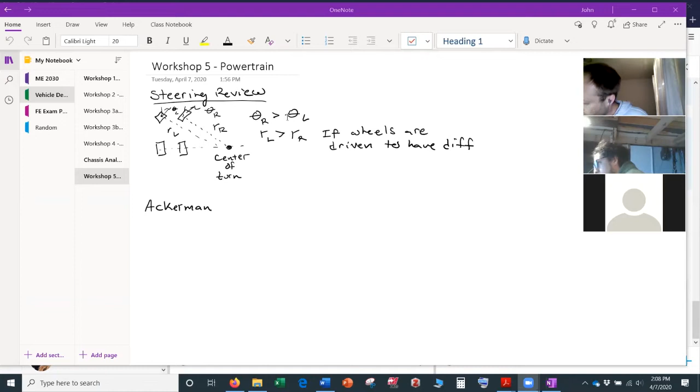But so to set up our car so that we get this to happen, basically, we set it up in what's called Ackermann geometry. Oh, before I get into Ackermann geometry, we had to talk a little bit about some other angles on the tire, right? So if we had our tire, maybe this was the inside and this was the outside of the car, and our upper ball joint connected here, and our lower ball joint connected here.

I'm gonna unmagnify that a little bit. Maybe that was a little bit too much. It's still a lot. I can't draw a tire with just a little bit of camber. There you go. There's just a little bit of camber.

So here's your upper ball joint, here's your lower ball joint. And right here, this was our steering axis. So this is what the tire rotated about, right? And so if we drew a vertical line right here, kind of the center of the tire on the ground vertically up, this angle right here was our kingpin inclination. So we call that our KPI, right? And we said our KPI was usually around 5 degrees pointed towards our car to help with stability.

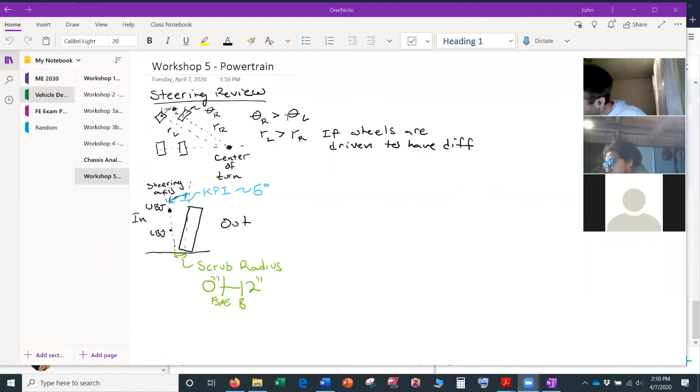And then we had this distance down here. So where this hits the ground versus here, we call that the scrub radius, right? And this scrub radius was usually larger than 0 and up to about 2 inches. FSAE was probably in this range, and Baja was a little bit more over here. So formula is a little closer to 0, ease of steering basically. Baja we go a little closer to 2 to help with the weight shift and the stability of going over the big rocks, kind of straight line. Help us keep the car driving straight.

And then we also should keep in mind, I heard max for us could be like 2 inches. That's like max. Yeah, I think that would be the max you would think about going. But I think it's going to make your tire harder to turn, and I don't know how much you need the stability. So I would think you would probably go somewhere between 0 and 1. I don't think you'd push out to 2. Oh, okay. But I wonder, at least for Baja, if our max is 2 and you're at 2, what if you did like 4? What would that do?

But then I think your tires are skinnier, right? Yeah, they're a little bit skinnier. They're 7 inches wide, roughly. Our formula tires are 8 inches. Oh, okay. So that's probably a little different. Yeah, I mean, it just would get really hard to turn, right? Because as this gets angled in, you imagine as the tire turns back, it rotates in and down basically into the ground.

Right. So it gets really hard to turn your wheels, essentially. So you probably don't want too much. And then it's also feel, right? I think it's feel, and then you could also heat up your tires that way.

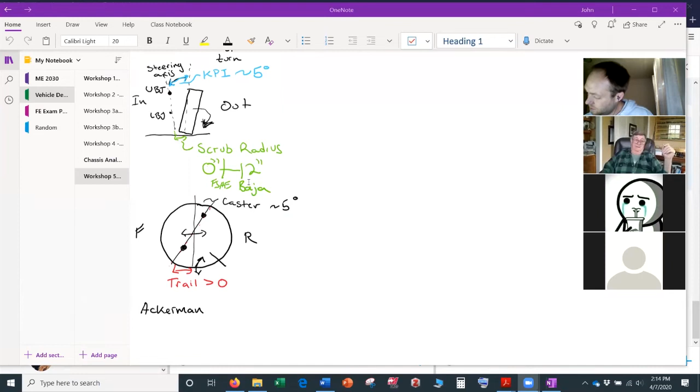So we can step into a little bit of Ackerman geometry. So if we have these 4 wheels, again, we're looking at a top view. This is the front of the car. Here's the rear of the car.

Remember your first steering setup? I still remember those days. My first setup? Yeah, remember we messed up what Ackerman was in the first year, and we had to flip everything around last minute, and we had no scrub radius. Oh yeah. Wait. That was when Luis was still doing front, right? Yeah, I think Luis was doing front. You're right. That wasn't you. No, I was doing the steering though.

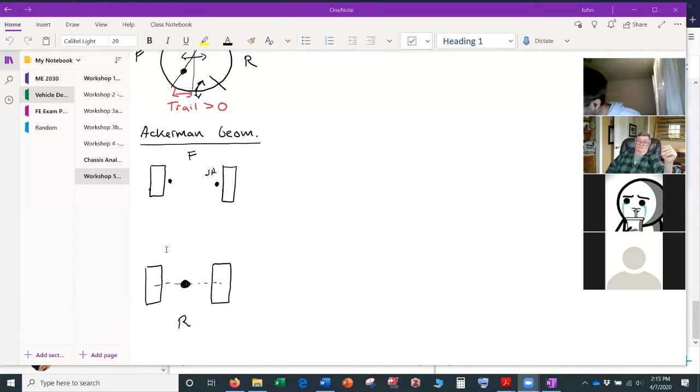Okay. So here's the steering axis in the top view, and usually you draw a center line between your tires, and you put a point in the center. Then you draw a line from your steering axis back down here, right? So these are your 2 steering axes. And to get this Ackerman geometry, you want your connection to your rack.

So let's put a rack here. Here's our rack. And at the end of the rack connect 2 tie rods. I'll make my tie rods these colors. And at the end of the tie rods, if you have good Ackerman geometry, you lie on this line. So this is Ackerman geometry right here.

Remember that this was not completely accurate because your rack isn't necessarily in a straight line here, and it's not a solid bar. Ackerman did this for a horse-drawn carriage, so it had a single bar that went across. So now that you have your rack, this is an initial setup, and then you want to test it with that model that we used.

But this will give you Ackerman, which will set it up so your right tire turns a little more than your left tire on a right-hand turn. So, deficient Ackerman. If you set up in this area, let's say you have your tie rod connect here. So these are your tie rods, right? Let's say you come back here, something like this. And here's your rack again.

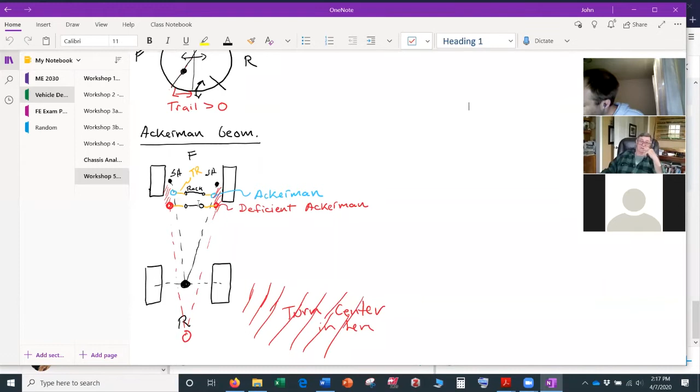Okay, so here you go, it's in here. Here's your turning center. Perfect Ackerman, your turning center is like right here. And then if you go excess Ackerman, so let's say you connect your steering arm somewhere in here, basically. Then your turning center is going to come up in front. So here's where your turn center is.

Right, and that would be the case where you make a connection here, or like a connection here to the end of your tie rod, which basically means your steering arm would look like this, right? So you'd have usually some steering arm coming off your upright. And so this line would look something like this. We'll just pretend, and they would meet somewhere here, basically, right?

So if you do this line from your steering axis through your mounting point to your tie rod, so we can do a little rack. Here's your little rack. So if you have this mounting point and you draw a straight line and it goes to the front of the rear axle, then your turn center is gonna be in front, and that's because of this point right here, right? So this was deficient Ackerman or excess Ackerman.

Right, versus vice versa. If you have this connecting point go outside, then you draw this straight line, it's going to come behind, and then your turn center is going to come out in the back, right? But make sure, this analysis is just to get you in the ballpark, right? So you should really simulate what we did last time and see where the turn centers actually are with an actual rack and pinion system.

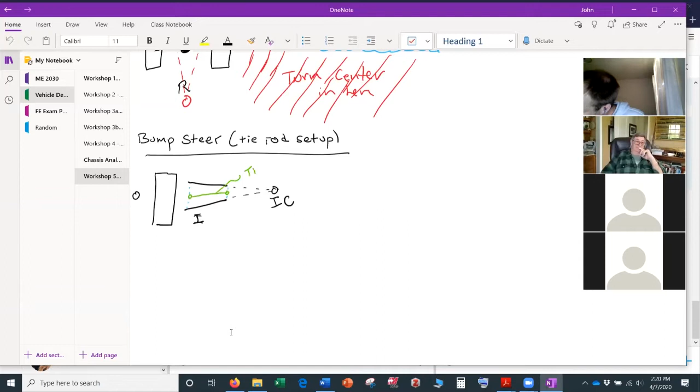So we extend those out. And this point was our instant center, right? That's what we say our tire moves around. So if we want to get it so that our tire doesn't toe in or out as it goes up and down, keeps the tire straight, then we want our tie rod to also point to the instant center, and it should have this length.

But the thing you can do is you can move it inboard and outboard. Because you imagine moving your tie rod inboard and outboard up here, right? You're gonna need to do that so you can get the right connecting point. So it's kind of an over-constrained problem. So in terms of this, we say that the tie rod must point at the instant center, must be length as shown above, right? But you can move it inboard or outboard.

With a smaller penalty.

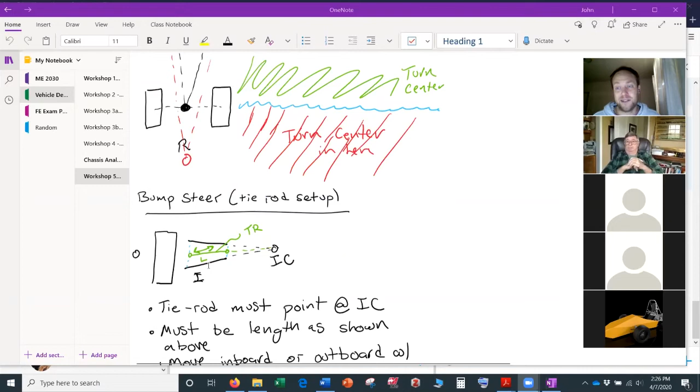Last time we were messing around with the geometry, we were messing around with the rack length. You can't really mess around with the rack length that much, to be honest, because your bump steer is going to control a lot of your rack length. Because this position where it mounts is so fixed, you make up the difference by modifying your rack length. You don't modify where you connect out here, because that determines too much of your Ackerman geometry.

And then the frame would affect it too, technically. Yeah, it can't run into a frame tube member, right? So where you put this thing forward and back, you probably also don't want it sticking way out of your frame. Our frame was at 19, and our rod is like 18 or 17, so it's shorter. Well, you don't want smaller, because then it's probably going to hit one of the tubes to go out to your tire unless it's very parallel to the ground. Depends on the angle, right? For example, this tie rod might hit your frame if your rack's too small. Yeah, we definitely got a big rack.

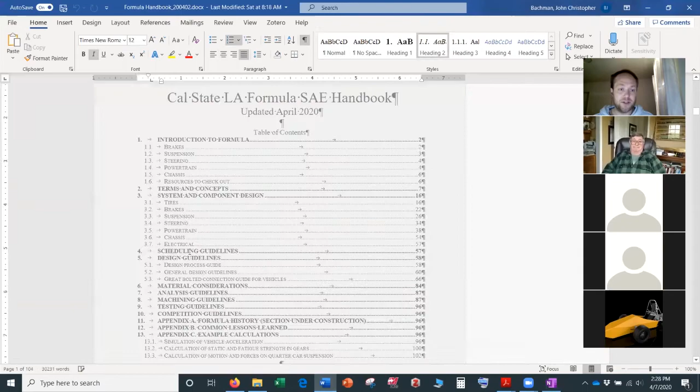So if we plotted the slip angle versus the lateral force, it was the slope of these lines. So the slope of these lines is the cornering stiffness, essentially. So the more slip you get, the higher the force is going to get. So for an oversteer vehicle, whenever you have alpha in the rear greater than alpha in the front, that basically means that the slip angle in the rear, like I drew now, is quite a bit bigger than the slip angle in the front, which is common for our cars.

You're going to get oversteer, and that's typically due to, one, the CG is near the rear. This basically means force in the rear is larger than force in the front in that case, right? So this is force in the rear and force in the front. And so to have a larger force in the rear, because the CG is closer to the rear, you need a larger slip angle, because the cornering stiffnesses are pretty similar. The other thing that can do that is if you have more weight transfer in the rear.

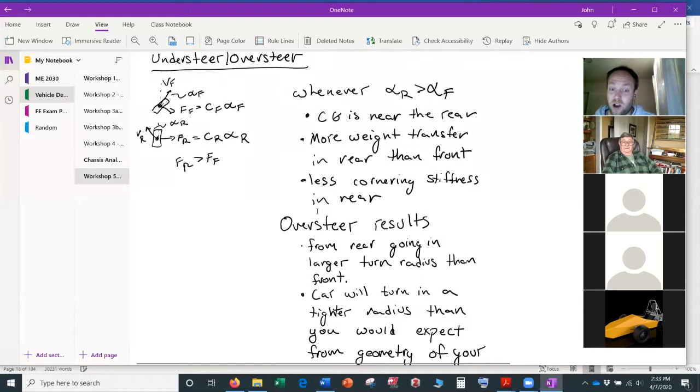So basically, if you have some Ackermann setup, or let's just say from what you expect from the geometry of your car and tires, based on what you predict from your tires, you might predict you're going to turn around this point right here. But because dynamically you have a larger slip angle in the rear than the front, you're actually going to be turning around a tighter turning radius. And your front is going to dive deeper into the turn. So your front's diving deeper into the turn.

And this gets worse the harder you turn. So you imagine up here, if these forces start to get larger and larger, the difference between these two is also going to get larger and larger. So you're going to oversteer more and more.

So we kind of talked about how the drivers complain a lot about oversteer or understeer. With oversteer, you're going into a turn, and as you're getting to the pinnacle of the turn, your car basically keeps going in more than you want. And so you end up thinking you're on your line, and you keep having to back away from it because your tire's pulling you in there.

So that was kind of what we covered in terms of steering, right? And so to correct for some of this, you typically have some anti-roll bars, or you mess with your shock setups, like the stiffness of your front versus rear shocks, or your tire pressures front and rear. So typically on the track, you actually will want to adjust to get closer to neutral steer. So that's one reason why you might just have one anti-roll bar, so that you can adjust the relative stiffness of the car in the front versus the rear, so that you can tune in a more neutral steer car.

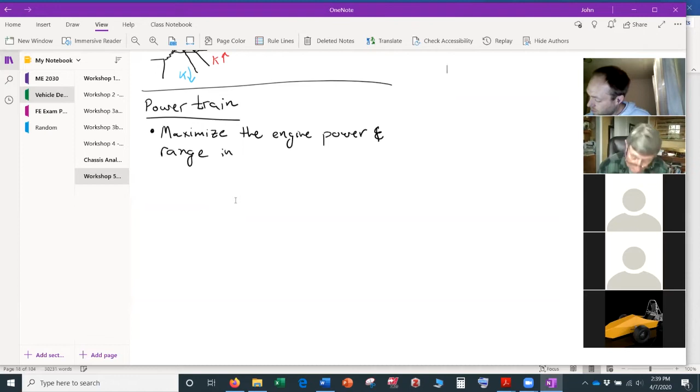So that's one of your first goals. Baja don't care so much about that, but then for drivetrain, so that's kind of the engine power unit type folks. Drivetrain wants to maximize the time when operating near peak power, right? So your powertrain, your drivetrain should be designed to keep your engine operating near its peak power point, right?

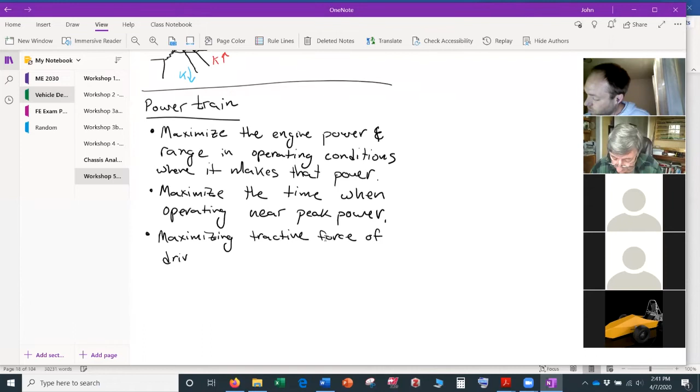And then also, if they get any say in the tires or some geometry, they should be maximizing the tractive force of driving wheels, right? So that's why we kind of started off with just basic dynamics at the wheels, basically, because any decision you make on the car, its influence has got to be done through the wheels, right? So it's kind of the gatekeeper of any decision you make.

And you have these other goals, right? Which of course are like reliability. This thing can't break, right? You probably want it to be drivable by your drivers. I mean, so you design some great car, but it's too complicated for any of your drivers to drive, it doesn't do you any good, right? And it better integrate with the vehicle and suspension.

Vehicle suspension and dynamics, right? So an example of that would be the Baja team, they drive with a U-joint. So that's actually one of the kinematic links of the rear suspension, right? So anything they do is drastically affecting the rear suspension.

Or like in the Formula car, they want to run a double wishbone suspension, right? Which basically means you cannot run a U-joint for that type of suspension. So the drivetrain is kind of forced to run a CV, something that can allow for a change in length of their drive shaft, basically, like their plunge. So you got to keep those in mind.

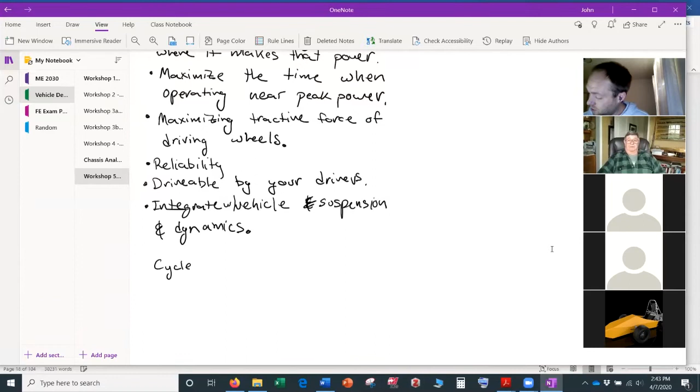And we're gonna talk a little bit about the engine. So we're gonna do kind of the valve plot, the cycles of the engine. So this will be kind of a review if you were there for talking about the cycles of the engine. Right, so this is gonna be a 4-stroke SI, so that's spark ignition. We're gonna be talking about 4-stroke spark ignition since that's what we all use.

Oh man, how can we continue without Juan? Just kidding.

So we're gonna start off with the intake stroke, and we're gonna draw the engine. So we have our spark plug, and then we're gonna draw our little valves in here. These are supposed to be valves. Should kind of be bigger. So here's our cylinder wall, and here's our piston, and then here's your crank, right? So that's our crankshaft. This is our connecting rod, right?

And so this usually starts around 0 degrees and goes to about 180 degrees. So that's when it goes from the top down to the bottom. So when it's up here, this is when it's at top dead center. And so we can also draw this on, so this is your crank angle, right? And we'll say the intake valve will be open. So let's break this up into 180, 360, 540, 720. So that's 2 revolutions.

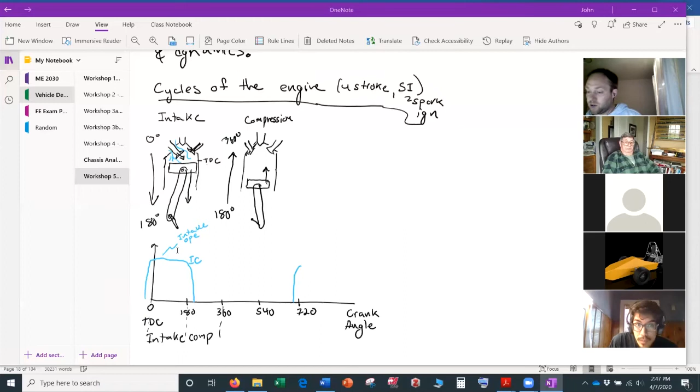So this is basically intake in this area, is what we roughly say. Here we call this compression, right? And so once it gets back up to about 360 degrees, you're going to have your spark, usually a little before top dead center.

So here's your spark. And that's usually at the start of your power stroke or your expansion stroke. So we have power or expansion stroke is what we call this. So it comes down, closes. So both valves are closed in this instance. So now it's going to start coming back down. And at the start of this thing sparked, right? Started the flame propagation.

And so this is rotating this way, of course. So it's going to kind of come back down to something similar. Right, so there's the crank arm. Here's your connecting rod, rotating back down. This is traveling back down. So this is going to go from 360 degrees to about 540 degrees during the power stroke, right? And so this is where you're getting all your power back out. So this is your power stroke.

And then at about right before 540, you're going to get your exhaust valve opening. And it's going to stay open and it's going to overlap slightly. And I should call this point your intake open. And at this point, this is your exhaust valve closing, right? And so there's some valve overlap.

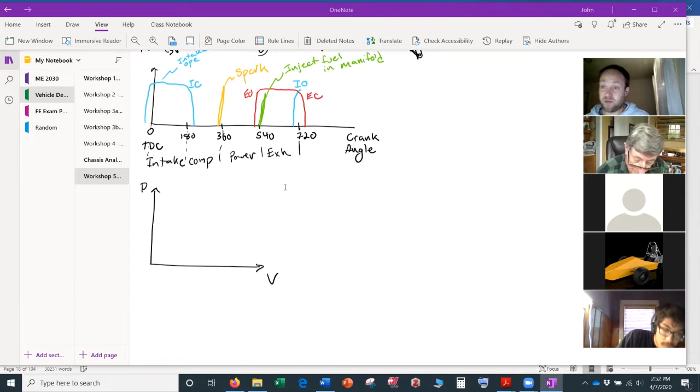Okay, and so we're gonna have some different phases. So here we're gonna have the volume at bottom dead center, and here's the volume at top dead center. Sorry, top dead center has the smallest volume. Volume at top dead center, and here's the volume at bottom dead center, right? And so the difference between those two, volume at top dead center and bottom dead center.

So if we kind of drew some lines here from here to here, this is the stroke of our engine. So the difference in the height, where the piston's at top versus where it's at near the bottom, that's your stroke, right? And then the volume displaced is equal to your stroke times the area of your piston, right?

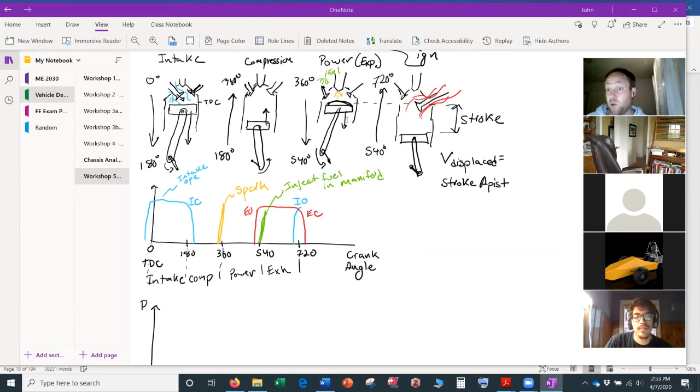And the volume at top dead center is this little head volume in here, right? So you can design for that. And if you wanted to decrease it, you could have like a hemispherical piston head, right? So that'd be one way to decrease that value if you wanted.

So what it looks like, right, is you start off at 0 degrees right here. Maybe I'll draw it in black and I'll say this is 0 degrees. It's gonna be blue. No. 0 degrees, start of the intake stroke. Sorry, I can't make up my mind today. So we do our intake, and our intake is going to go from 0 degrees to 180 degrees. So that's our intake.

And so basically we are at one pressure, kind of at our inlet pressure, and we were sucking it all in, and now we're full of air, right? So next thing we close it off and we shrink the volume, but in this case the pressure goes way high basically. We can do green for the compression stroke. So you're going to get kind of this behavior, right? So this is your compression stroke.

And then you're going to spark it. Boom. You're going to get some big increase. Hopefully you left yourself a little more room than I did. Somewhere here, something like this. And this is the spark. So you get this huge increase in pressure at this fixed volume.

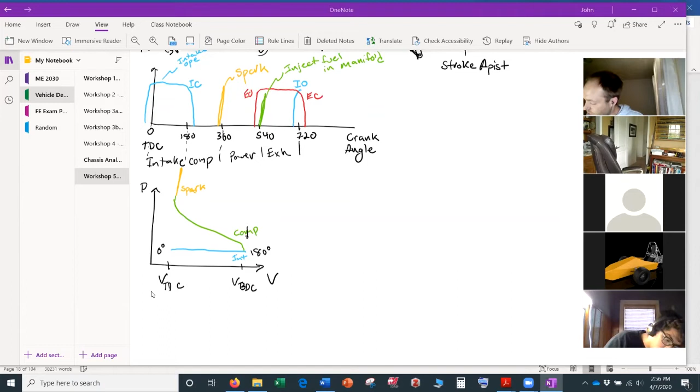And then you basically get your expansion stroke. So what color do I want to be? We can do power stroke. Then you do your power stroke. So yeah, it's not really a very good shape for it. This is your power stroke, right? And then you have your exhaust stroke. So your exhaust goes from here to here.

So that's 0 to 180. This was 180, sorry, to 360. This is 360 degrees, right? And then this came down to 540 degrees, and this went to 720 degrees, basically, right? And then you go from here to here. Start to exchange the gas.

So does anybody remember when you go in a clockwise fashion on a PV diagram, what does that area tell you? Is it work? Yeah, work. Good work or bad work? I want to say good. Yeah, it's good. So this clockwise area is work out. In this case, when you're going counterclockwise, this is work that's input.

So on your PV diagram, you want to maximize this right here. So this is going to be your P inlet, basically right here. This is your P exhaust, right? So work net is going to be equal to work out, which is the upper area, minus work that has to go in, which is the lower area. And this is also known as pumping work.

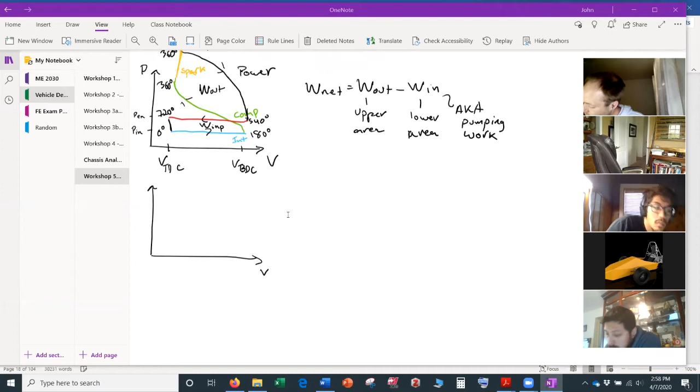So one common metric to compare engine performance: you take these PV diagrams and you take this net work right here. Usually this P in is around atmosphere, and then you have your V top dead center, V bottom dead center.

And this value right here, P, why am I blanking on, what is this called? What's IMEP stand for? Pressure? Is it internal mean effective pressure? Yeah, internal mean effective pressure. Thanks, Rafa. So this is internal mean effective pressure. I think that's what it is. It might not be internal, but could be. But anyways, what people name it doesn't really matter.

This just has the net work in here basically, right? So this pressure right here, it's kind of like normalizing for the volume of the engine so you can compare it to the other engines. So the net work out is going to be equal to your volume displaced times your pressure IMEP. Right. So this is this distance right here. Usually you put this at like 1 atmosphere. So you give a pressure reference to atmosphere basically. So it's basically this distance right here.

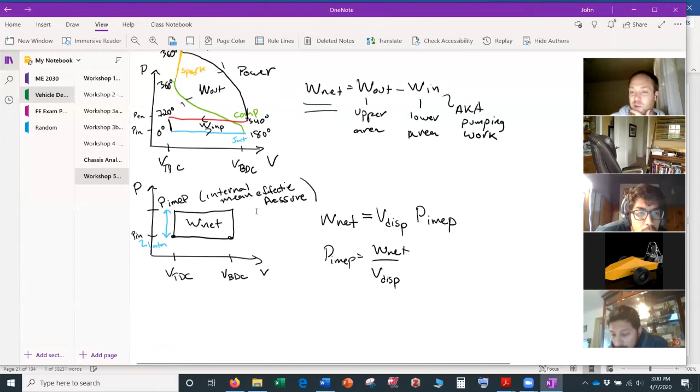And this is nice because you can see it's basically you take the net work. So we can see that P IMEP is equal to the net work over the volume displaced. So it kind of tells you how good are you doing, irrelevant of how big you are, right? It kind of normalizes. So if someone's got a really big engine and you got a small engine, of course they're going to have more power output, right? Okay, so it's a good metric, and you'll see we might use it later.

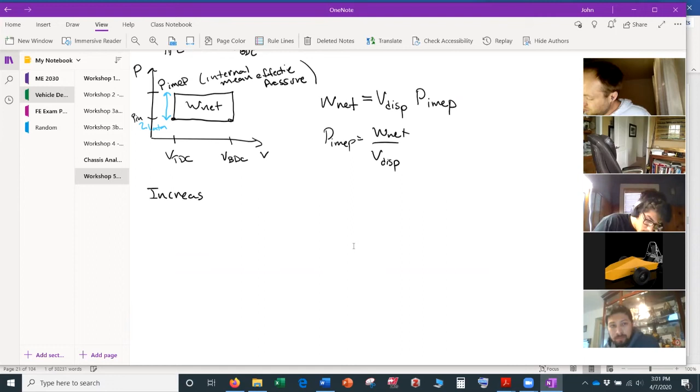So what do we want to do, right? We talked earlier. So we want to increase power. Power out. So basically increase W net, increase the net work. So our first option to do that is to have more air and fuel. So the more air and fuel you can burn, the higher you can spike this pressure up basically, right? So if you can get more air and fuel, that's better. And so to do that, you can—

I had a question, Bachman. Yeah. What does it say in blue on that PV diagram above? It says 2 something. So this is 1 atmosphere. So usually the inlet pressure, you say it's like 1 atmosphere, right? Okay. And then this pressure is just referenced to atmosphere, right? So if you're at 1 atmosphere here and you say this is 10 atmospheres, that's basically saying that the distance, this is usually gauge pressure.

Okay. I believe actually. I should actually check that. But I think it's kind of referenced to the inlet pressure. So it's the height from here to here basically. It's not from the ground up. It's the height of this, right? And so you could kind of put this at the inlet pressure around 1 atmosphere.

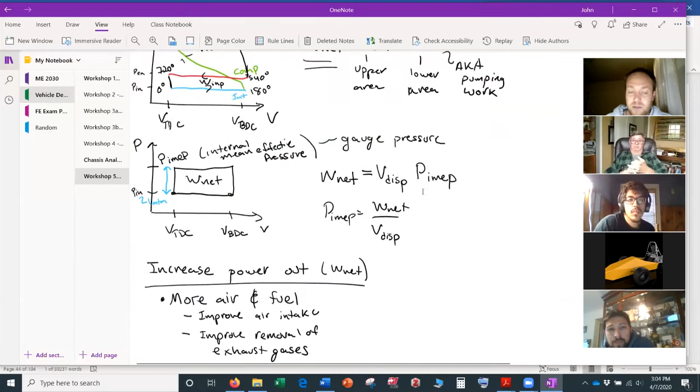Right, so we kind of went through the PV diagram just for Bill. So you come in and you push up and you push out all the exhaust gases, but the piston head can't actually go all the way up and clear out the full cylinder. It actually leaves a little bit of residual gas inside the cylinder every time. And that dead burnt gas has no oxygen in it. That'll take up usable volume that you could suck in fresh air with, right? So if you can improve the removal of your exhaust gases, you want to do that.

And that's make your valves bigger, improve your valve timing, get your exhaust flow to have as little restriction as possible. We've even talked about using some resonance effects. I'm not going to talk about that today because it's too deep, but it's in the handbook. All right, so we can force air in. Talked about that, and we can increase the density of air by making it cold.

I mean, these are just kind of a common list. The engine's about as complicated as the whole rest of the car almost, right? Probably in actual design. So another thing you can do to improve your power output is you can decrease your pumping losses.

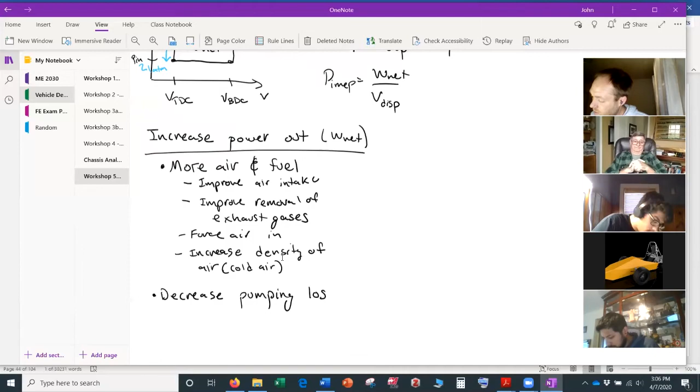Right? So we talked about how to decrease pumping losses. We talked about how we take the intake air in at a lower pressure than when we push the exhaust gases out. That actually consumes power, because we have to push exhaust gases out at a high pressure. So if you can decrease the area of this little rectangle, then you can increase your net power out of your engine.

So common ways to do that is to increase the inlet pressure, right? If you increase the inlet pressure by using a turbo or supercharger, you'll actually flip these pumping losses, so decrease pumping losses. The other thing you could do is suck the exhaust gases out with a vacuum, but I don't think you typically do that. So we decrease the pumping losses, and that's usually through a turbo or supercharger.

Or we can increase. So if we can increase this max pressure up to here, so more air and fuel gets us a higher spark. We can increase also where we get for pressure in terms of this green. So increase pressure before spark. That involves increasing the pressure ratio, or compression ratio.

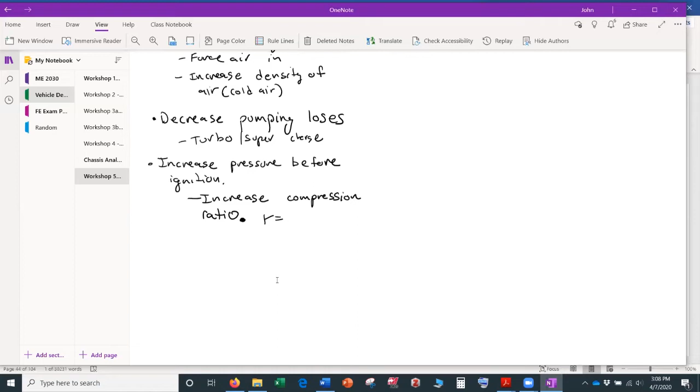Right, and so your compression ratio, we'll say R, is going to be your volume at bottom dead center over your volume at top dead center. That's basically how much you compress the air. It's the ratio of this volume to this volume, and you want this to be as high as possible. That's why race engines push this up into the 14, 15 range, maybe even higher. Your typical passenger vehicle won't go to those higher pressures; they'll be down in the 10, 12 range.

More air and fuel. The one thing I left off there was increased displaced volume. That's the kind of American way. Why mess around with the little stuff? Just make it bigger.

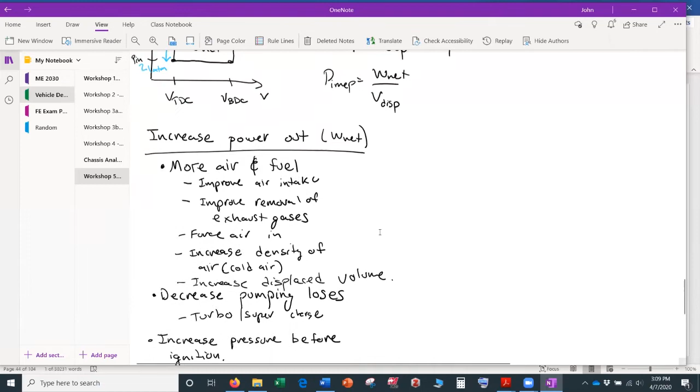So those are some of the ways you can get more power out of your engine. Let's look a little bit more at something else you can do. You could try and improve the combustion. The first thing I should say about the combustion is that the mass of air you actually have to burn inside the cylinder is usually put around the volume displaced, because you assume you can't get the full volume at bottom dead center. Ideally you go all the way down to bottom dead center and have a full cylinder, but when you pushed it out, you actually had some leftover burnt gases.

So typically you say you can bring in air at that volume times the density of the air at the inlet, times a volumetric efficiency. A really good engine will completely refill the displaced volume. This is actually just the density of air at STP, standard temperature, because the efficiency corrects for bad densities as well. If for some reason your air gets too hot as it goes in your engine, you'll take a penalty. This is basically how much air you can fill in the volume you're taking in.

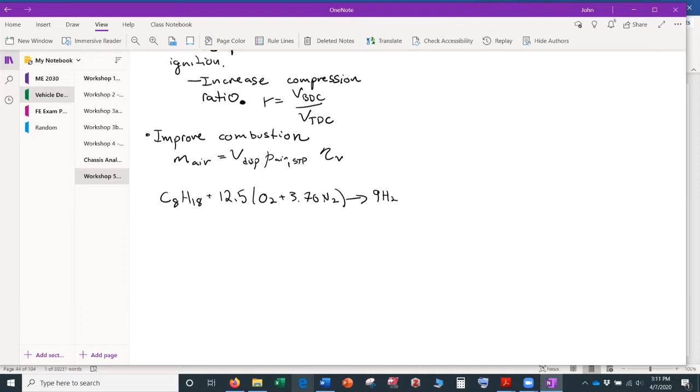So if you've got a 5-liter engine, maybe each one of your cylinders is 0.8 liters. When you suck it in, are you getting 0.8 liters of fresh air? You take this air and burn it with gasoline, roughly this, and you end up with mostly water and carbon dioxide. So for every molecule of gas you put in, you need about 12 molecules of oxygen. The more air you can get in, the more gas you can put in. That's why the name of the game is get air in there.

And so your air fuel ratio, this is at stoichiometry, so we call that stoichiometric. The ratio of air to fuel at stoichiometric by mass: this would be 12.5 to 1 if you count by molecules or moles, but we do it by mass since we like to work in mass. It's typically around 14.7, and that's unitless. If you have an air fuel ratio in your cylinder that's higher than the stoichiometric one, that means you have more air in. That is what we call burning lean. And when you're burning lean, one, you're going to burn hotter.

You're going to have more fuel efficiency. So that's an air-fuel ratio. So you're going to have a higher fuel efficiency because you're burning all of your fuel.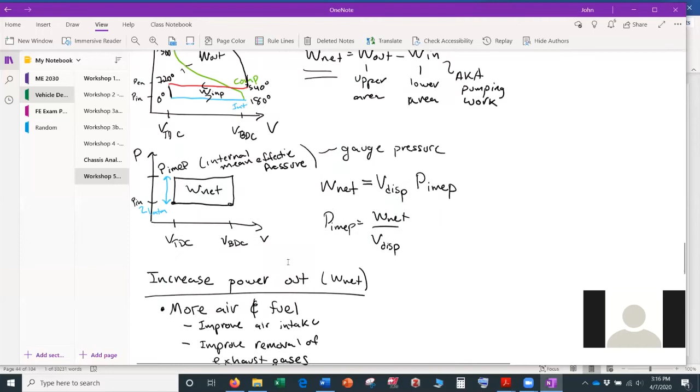Yeah. I think the term you want to use is not richer, but less rich, more lean. You want the engine to be as lean as you can make it without doing damage to the engine, because if you get too lean, you can burn valves, right? Yeah, if you get too hot. And another thing it can do is you can detonate the engine. Detonation happens when the head is too hot, and the engine can actually blow the piston up, crack the head, do a lot of serious damage.

So you want to make it as lean as possible for power. In fact, the old aircraft engines used to have a setting called lean best power, and they would watch it as they leaned it out, and they have what they call a torque cell on the engine. They could see how much power the engine was making, and then they'd just back off or increase the mixture a little bit to make it a little richer, just to save the engine. So lean best power was the optimum setting for the fuel mixture.

Interesting. Well, I'll look into it a little more next time, just to look at the exact air fuel ratio you'd run relative to stoichiometric. And we can look it up here if we have more time. And Bill brings up a good point about auto detonation. So if things get too hot, or you run compression ratios that are too high, which also heats things up a lot as you compress it, your fuel will get so hot that it'll explode without the spark, basically. Or it'll explode before the flame from the spark reaches there.

So what that'll end up doing is, one, it could explode too early, which will obviously send huge forces through the engine when they don't want to see them. But a little bit of knock is usually just because it's somewhere in the stroke, but the flame front hasn't hit it yet. But that's not good either. It'll tend to break things. So usually there are little sensors on the car now, little microphones, and they'll listen to that. Let's see here. I might have some charts on this.

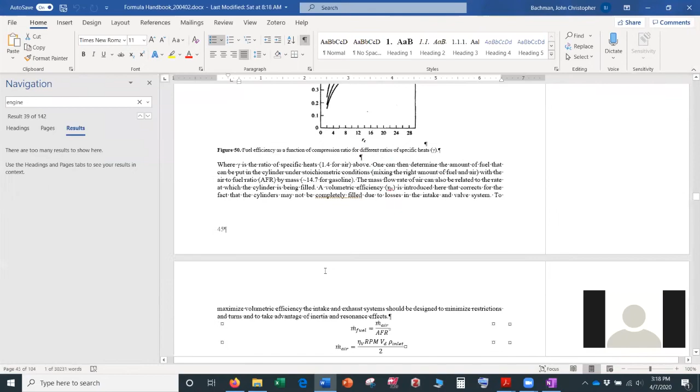So here you can see the fuel-air equivalence ratio at 1. And here you can see the internal mean effective pressure. So this is going to be related to your power output. So having a fuel equivalence ratio slightly close to 1 will typically be highest.

But you'll see here these dashed lines. These dashed lines are for real engines. And you can see the highest is usually slightly higher on the fuel than air. It's a little higher than 1. So yeah, at least the data I've seen,

let's see if I have any other, is yeah, you definitely don't want to run too rich, but especially I think as you get leaner and leaner down here to stoichiometric, you're going to get hotter and hotter. And it's probably a trade-off of efficiency too.

So here's fuel efficiency versus compression ratio. And I'd have to look at this a little bit more, but some of the confusing parts about this is people use different equivalence ratios. So I typically use what's called lambda, but not everyone does that. So air-fuel ratio equivalence.

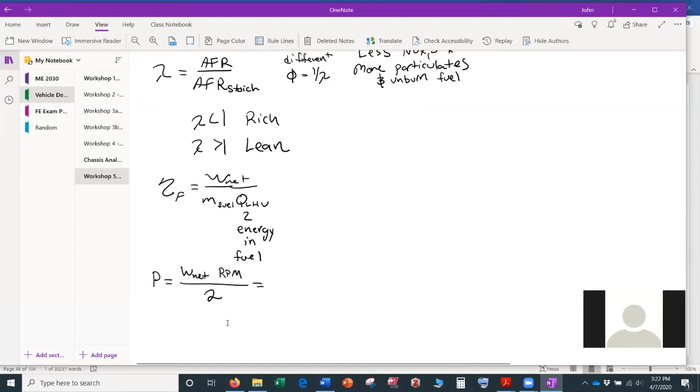And we know that the power of the engine is the net work times, I'm just going to say RPM, over 2. The units aren't quite right, so there's some factors in there for the units. But the net work here is going to be equal to the fuel efficiency times the mass of the fuel times the lower heating value, how much energy is in the fuel.

So if we put that up here, we're going to get the fuel efficiency times the mass of the fuel times the lower heating value times the RPM over 2. And the 2 just comes from the fact that you do 2 revolutions. Anyways, this power is going to give you a weird unit at least. We also know the mass of the fuel is going to be the mass of the air that you get in divided by the air-to-fuel ratio that you have, right?

And the mass of the air, sorry, not m dot. We also know that the mass of the air is going to be equal to the volume displaced times the density of air times the volumetric efficiency. So I'm just going to plug those in. So the power of our engine is our fuel efficiency times our volumetric efficiency times the volume displaced times the density of air times the energy density of our fuel times the RPM over 2 times the air-fuel ratio.

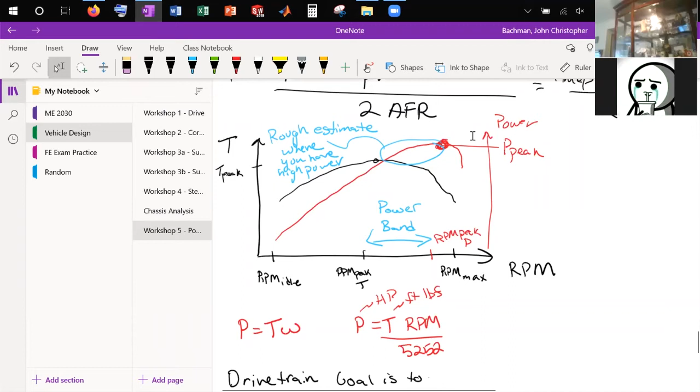So when you're driving, you want to generally keep it in that power band then, huh? Exactly, if you're trying to go as fast as possible, right? If you're driving around town, you don't need to quite keep it in the power band. All right. Thank you.

No problem. So now we get into drivetrain a little bit. Let's draw a very simple drivetrain system. Let's say your engine has an output shaft and it's rotating. So it has some omega of the engine spinning at a certain rate, and it also has some torque coming out of the engine. And that comes back to some other, you know, this could be a gear, it could be a sprocket, right? So we'll zoom in on this.

Come on, zoom. So we'll say this has some R1. This has some R2. So you have your engine, it's running this. So this has some omega 2, has some torque 2, right? And this is going to be driving some wheel. So this is your tire, and here you have some radius of your tire.

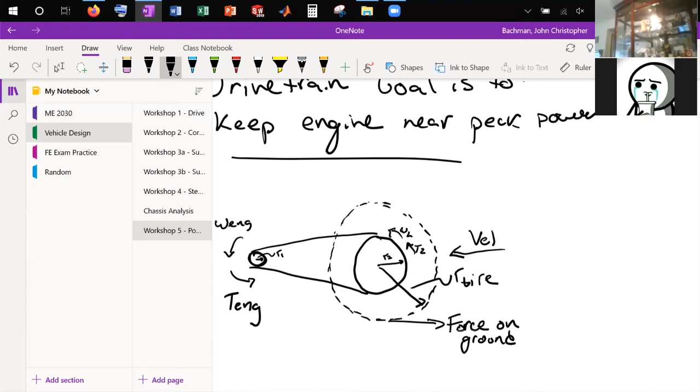And basically with your tire, you're moving at some velocity, and you're doing that because you're essentially applying a force. You're pushing backwards on the ground. So these are some force on the ground. So our question here for setting up our drivetrain is, how do we compare this?

So this is angular velocity. This could be like RPM, but typically we work in radians per second just because the math is easier. You can kind of just consider it like RPM. It has to do with how fast it's spinning. So how do we compare the RPM of the engine to the velocity of the car in this case, right?

So we'll call the ratio of R2 over R1 the gear ratio of our system, right? This has a larger radius back here than here, so we have a gear ratio in this picture of maybe 4 to 1 or something. So I know that the velocity of the tire is going to be equal to the radius of the tire times the speed at which the tire rotates.

I know that the speed at which the tire rotates is equal to the speed at which this sprocket or gear 2 is moving, right? They're rotating together, they're fixed. And I know that omega 2 is going to rotate at the speed of the engine divided by the gear ratio.

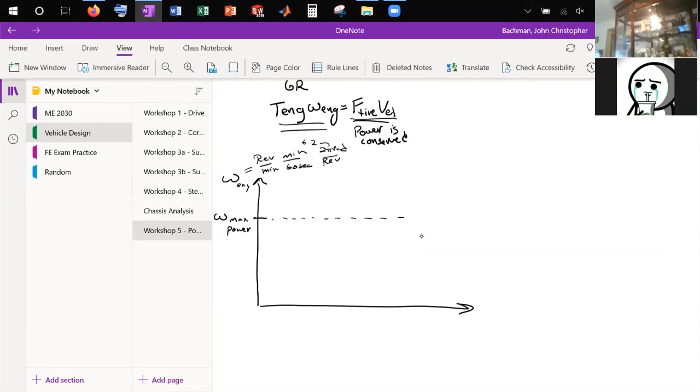So if this is omega max power, we want our engine sitting at this power the whole time. And let's plot this versus the velocity. So if I'm sitting in one fixed gear, what's the relation that I'm stuck on between velocity and omega? Well, I can see up here that the slope of velocity over omega engine is going, did I do this right? Oh yeah, no. So omega engine divided by velocity is going to be gear ratio over the radius of your tire.

So I'm stuck to straight lines depending on different gear ratios, basically. The slope here is the gear ratio over the radius of the tire. And this might be like first gear, second gear, and third gear. So if I have omega idle, this is the speed at which I'm idling at. Basically I'm gonna use the friction in the clutch to go from idle over to this velocity, right? It's like I'm not even in first gear. This whole time is basically either rubbing the clutch, or you have that torque converter, which is kind of a hydraulic mechanism in an automatic car.

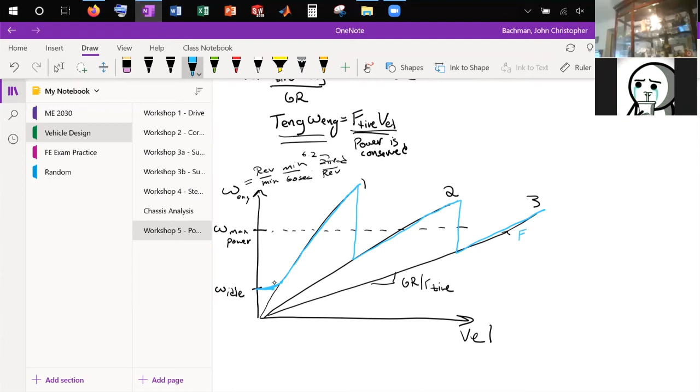And then you're gonna ride first gear all the way up to here until you're too high of an RPM, you're getting away from max power, that you need to drop down to your second gear. And then you're gonna ride second gear, start below max power, go above it, and then drop back down. So this is if you have kind of a geared system, like an FSAE system.

So Baja uses a CVT. Ideally Baja will come here, and then shift along this max power until they reach their high limit, and then they're gonna come up here basically. So this is like Baja, ideally. That's kind of the use of a CVT. It lets you sit right at that max power that whole time, you know? So let's pencil some of this stuff out here a little bit. When you're a geared car, you're basically forced to go along these lines as a function of velocity. And you could see here, this could tell you when to shift.

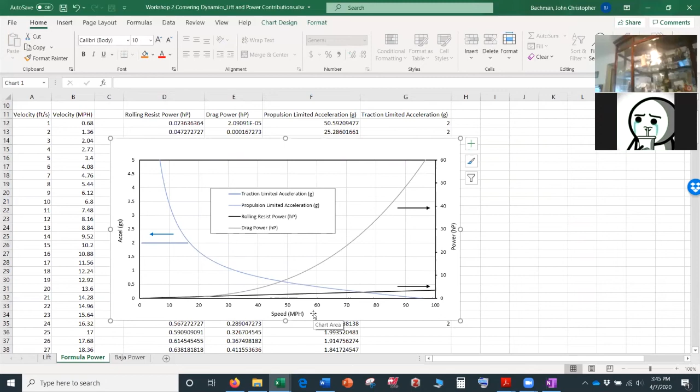So let's go back into this old document we were working on and see if we can do some stuff with it. Remember, before we were looking at different speeds, I gotta move this, there we go. So for different speeds, at low speed we were traction limited by this acceleration, right? And then we could get into propulsion limited areas. So since we already have this all set up, let's add some columns. I'm curious, as a function of our speed, what is the optimum gear ratio? So let's add some stuff into this. So insert.

Okay. So usually you have some fixed gear ratio. So fixed gear ratio. So like, you know, Formula, it's maybe like 3-to-1. Baja, well, they're both actually about 6, because Formula has 2 fixed gear ratios. We have our sprocket, and inside of our gearbox there's a fixed ratio that isn't a part of the shifting. And then we need the radius of our tire.

So let's say it's 10 divided by 12. It's 10 inches. So this is in feet, and this is unitless. Right, and then we also need to say, what is our RPM of max power? So if we pull up here. So here's our formula engine. Say here's 8,000 RPM.

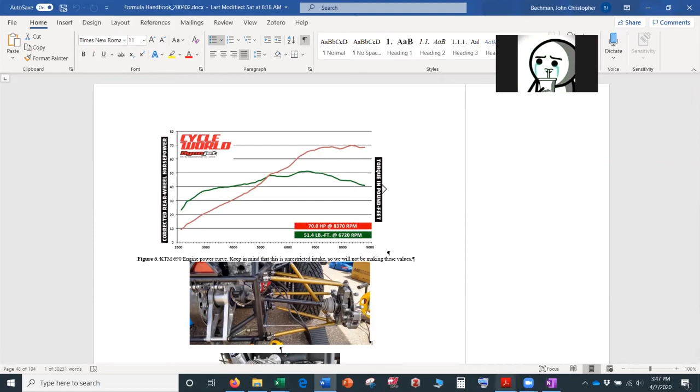Let me make sure I'm doing this all in the formula tab, because I think there were 2 tabs. Yeah, we're in formula right now. So I'll do this for formula first, but Baja, you can do the same thing. So before we were making it at 8,000, we're probably making it at 6,500 RPM now. So let's pretend like we're making our max power at 6,500 RPM. So 6,500, and this is an RPM. And we'll convert this to

omega max power. So this is going to be equal to this value times 2 times pi. Can you just do pi divided by 60 seconds? No, you need to do open close parentheses, I think. There you go. So it's roughly divided by 10. And so this is in radians per second. Okay, so this is going to be our optimal gear ratio.

Okay, so for our gear ratio, right? So if we know that our velocity is equal to our omega engine times, if we set this omega engine as the peak power, then the gear ratio, I should just draw this. 1 second. Scroll. There we go, baby. Now we're in business. All right, now we're scrolling. I'm scrolling on my end.

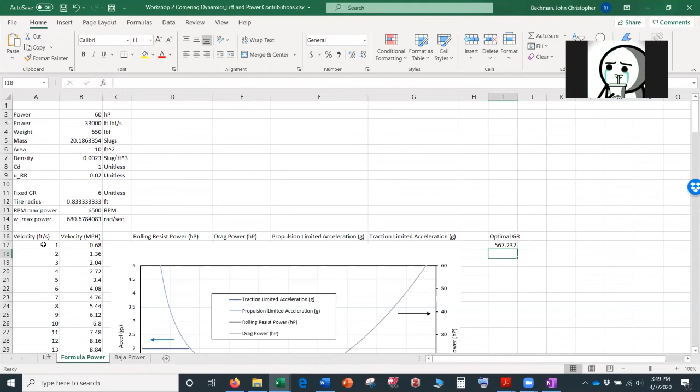We'll go all the way down to 136 miles per hour. Okay. I want to confirm what the fixed ratio is in the formula car. Oh, the reason is we need to divide this. So for formula, it has a fixed gear ratio. How are they? There you go. 2.19. So I should say that.

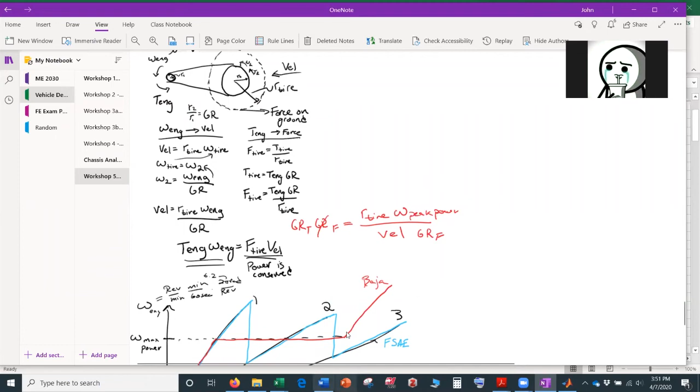So this gear ratio is actually equal to, like, you have your gear ratio of your transmission times the gear ratio that's fixed. You have to divide this gear ratio fixed across right here. So we also need to divide by our fixed gear ratio. Divide by our fixed gear ratio.

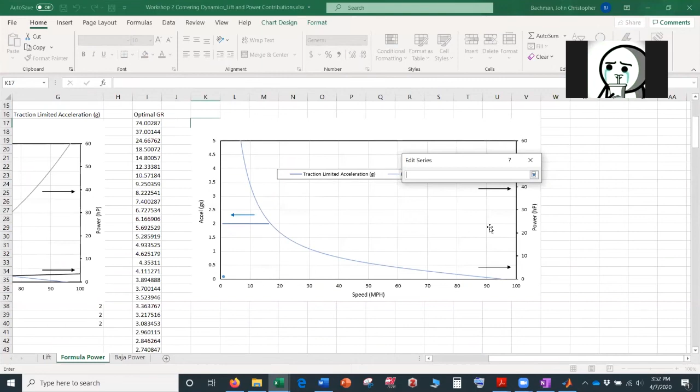Okay, so I'm going to copy this plot and let's put it over here. Actually, I'll put it on this plot. So select data. We don't care about the powers anymore, but we want to add this one, optimal gear ratio, and we want to compare the velocity in miles per hour to the optimal gear ratio. And hopefully it plotted it on the same axes.

Okay. So basically, here I'm plotting it on here. So it's accel in G's or gear ratio. I don't know why this one's like, why does this have a marker? I'll make this line black. All right. Okay.

So in order to have your engine at its peak power, basically, you'd see early on you need some crazy high gear ratio, right? And that's because your engine's spinning really fast and your tires aren't moving. So you need this huge gear ratio to couple them together. And then you'd actually need to come down to under 1-to-1 and all the way down to the super low gear ratio down here, kind of optimally.

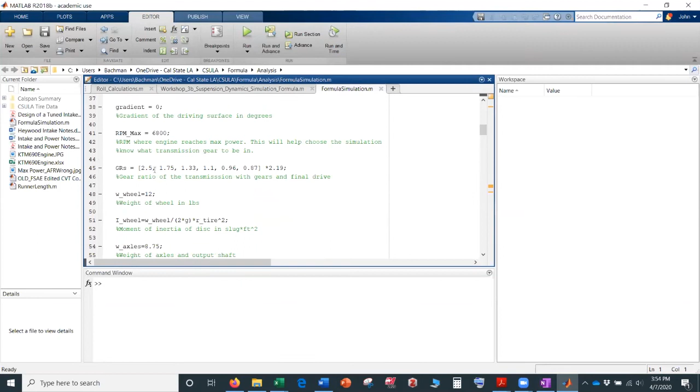And that's why, for example, in the formula car, first gear is 2.5, 1.75, 1.33, 1.1, and so forth. So you imagine they're going to chunk it. They're chunking this portion off into, you know, they have this gear for earlier on, then they have this gear, and then they have this gear, and then they have this gear here.

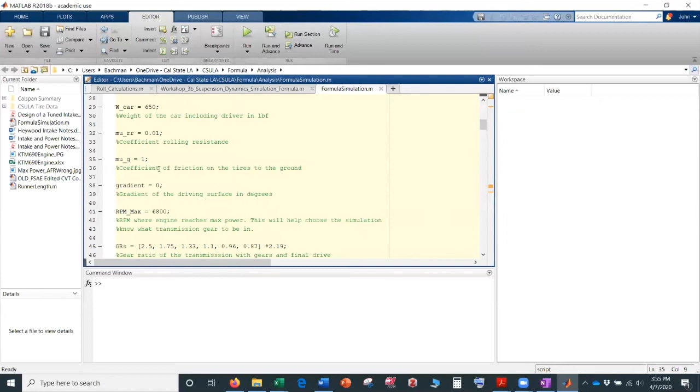So we've written a simulation which basically takes in a lot of the quantities about the car: the drag coefficient, the frontal area, density, right? Coefficient of rolling resistance, coefficient between tires and the ground. So we should jack this up. We know this is like 3. And then it takes into account the weight of everything and the moment of inertia. And then it basically runs the code for different sprocket ratios to see what the acceleration is like.

So I'm not going to run through all of it right now, but I'll at least run the code, because Baja has one too, and it'll kind of show you some of what's going on. So let's see here.

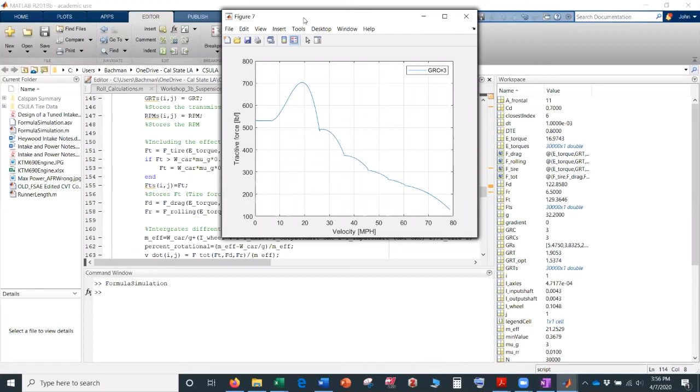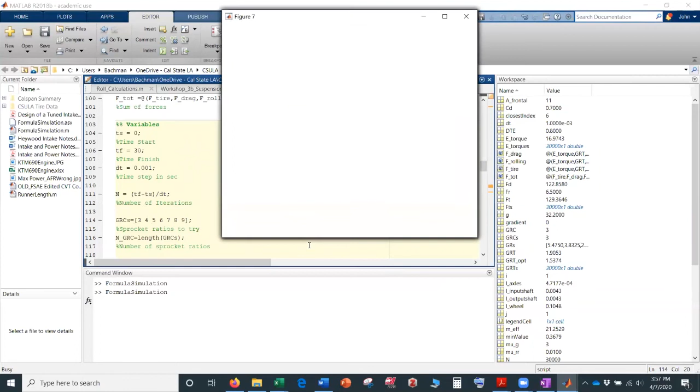So what you'll see is some of these high gear ratios, like a gear ratio of 9, are able to spin the tires, basically. So that's where we're peaking out up here. You can see some of these other ones, and you can see where they shift, right? So that's the traction versus velocity. Because this gear ratio is part of the fixed gear ratio, you can see how it slightly changes all the other gear ratios.

One thing you notice, interestingly enough, is that in these cases, for example, your max velocity, so let's look here, position. I'm going to run some more actually. Let's run some lower ones. 0, 1, 2, well, 0 is not going to make sense. We looked at this one, we looked at this one.

This one. So what you can begin to see here is that your final velocity at the end of this time reaches a maximum value. And what basically is happening is in these other sprocket ratios, you're basically being limited by the max RPM of your engine. You're not being limited by the power of your engine. So if we look here, for example, right?

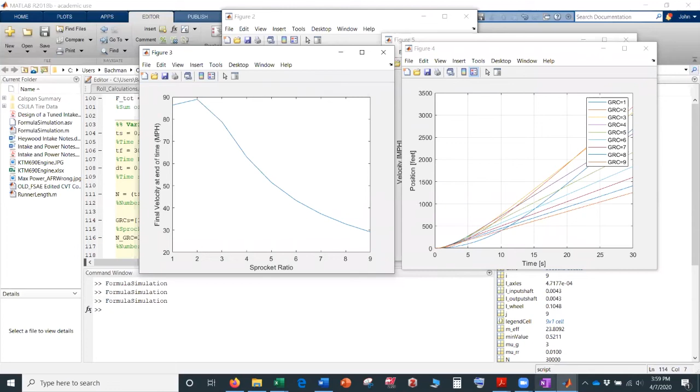If the max engine velocity in your last gear ratio doesn't allow you to go any faster, we can't reach the velocity that we were calculating earlier, right? Before, we were calculating these max speeds based on the power of the engine and drag and rolling resistance, well, you're never even going to reach it unless you gear it right, which we're beginning to see.

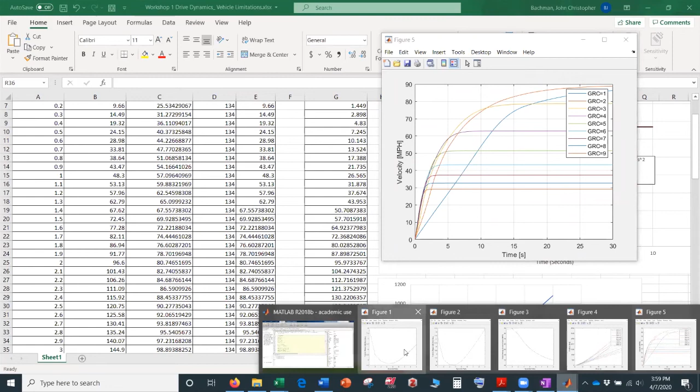So you can see gear ratio of 1, this blue one, gear ratio of 2, they're reaching that top speed, right? But if you use a gear ratio of 9, you can't reach that top speed. And you can also begin to look at, for different sprocket ratios, what is the time to reach 246 feet, which is the acceleration event, or 500 feet, which would be a long straightaway? You can see that you can get in just under 5 seconds.

If you, under 5 seconds, if you have a sprocket ratio of like 4 to 5. So that's one of the other powers of this code, doing some of the simulation. So there's also one for Baja. Let's run the Baja one. You can see how it's a little different.

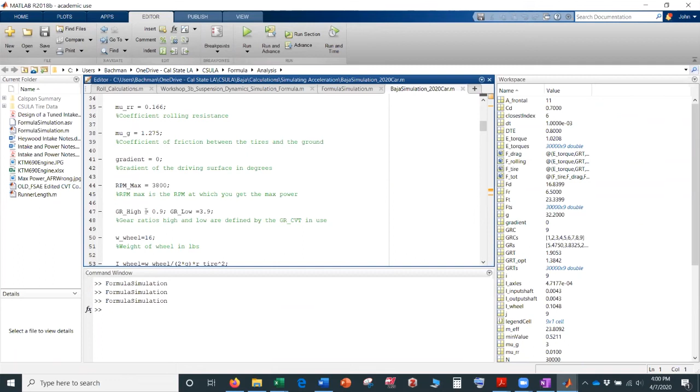So it takes in similar stuff, but in this case, for example, your high gear ratio and your low gear ratio of your CVT. So this is the range at which your CVT can shift. And then in this case, we try different gearbox ratios. So let's try some of these. And you'll see kind of the difference in how the system performs.

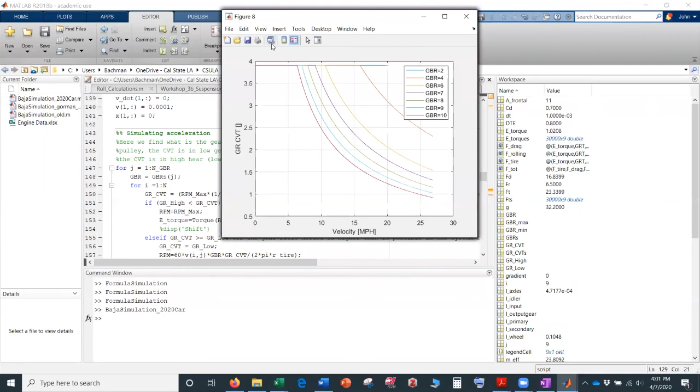For the fixed gear ratio, do you mean like the ring and pinion? I get confused. So let's see here, ring and pinion would be with a standard differential. On this car, would it be the gear ratio between the sprocket on the differential and the output shaft of the transmission? Exactly. So that's exactly right.

But the other thing with this KTM transmission is it has a final drive reduction inside the gearbox as well. So inside the gearbox, there's actually a reduction. I see. So there's the gears that are meshing and unmeshing, but there's also inside this gearbox that we can't see actually another fixed reduction. And it's what Bill talked about, the sprocket is a fixed ratio.

So for example, to calculate the gear ratios in the transmission, we have a fixed ratio of 2.19, and these are the 6 gearbox ratios that we have. I see. Okay. So yeah, that's a good question. Thank you. So going to Baja's.

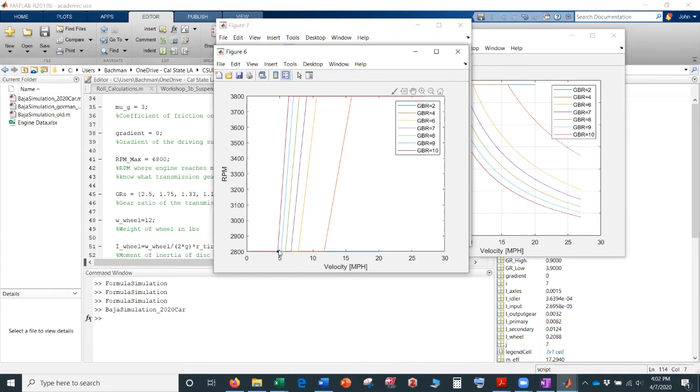If you look at Baja's car, it's a little bit weird in that it gets limited at 3,800. So for all these gearbox ratios, you come into idle until about 5 miles per hour, and then this is just your pulley grabbing on the CVT. So they run a belt and pulley CVT.

I was hoping it would show more than a belt. So they run something like this. Initially it's not even engaged until this one comes and grabs it. So that's how it kind of has a clutch in it. It's going to grab in, and then you're going to be in that very first gear for a while until it starts to shift. And then hopefully it shifts at this peak power RPM, which for us is pretty high, like 3,800.

And you can see again, here's the final velocity versus the gearbox ratio. So there's something up with the way it's running right now. Let me see. It might not be running for enough time. No, that should be fine. 30 seconds. No, this is formula. Baja. Let's run it for 30 seconds, and let's run gearbox ratios of 2, 5, and 10. Just try the bounds basically.

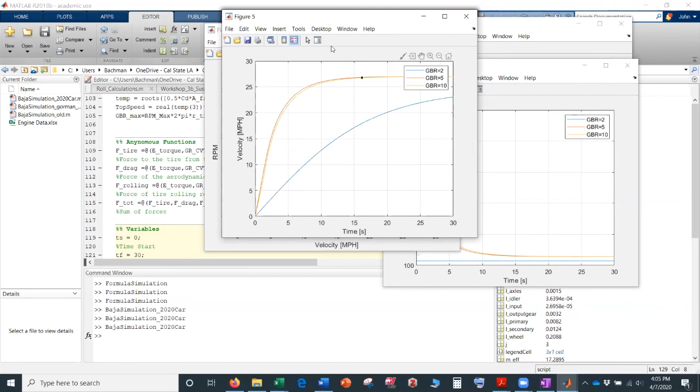I don't know why the top speed is so low. It's probably the rolling resistance is pretty high or something. But here you can see the time to reach 100 feet. It gets lowest around 5, and then it's going to come back up when it gets to 10. And so with that, I wanted to show kind of the behavior of the vehicle.

Let's see here. This is pretty high. Let's make this like 0.05. That's probably more realistic. And let's dial it in a little bit. So let's do something closer, like 4, 5, 6. Oh, let me see here. Let me make sure I didn't make this 4-wheel drive.

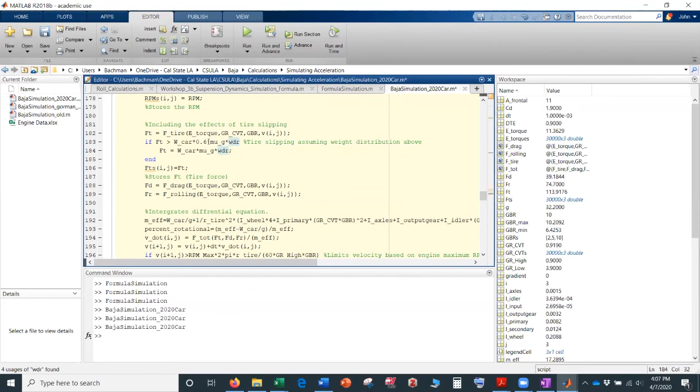There's a little part here where it sees if the tire is slipping. Yeah, so this is for 4-wheel drive. They're kind of playing with some numbers. Wait. Oh, the weight distribution's in there. Let me see, maybe I set the weight distribution to 1. No, it's still 0.6. Okay, no, that should be normal.

All right, so here's the gear ratio of the CVT versus the velocity. Here you can see the different tractive forces. So I wanted to look at... Okay, so here we're getting a little better. We're all kind of converging. 0 to 35. So all, let's see here, 1 to 2.

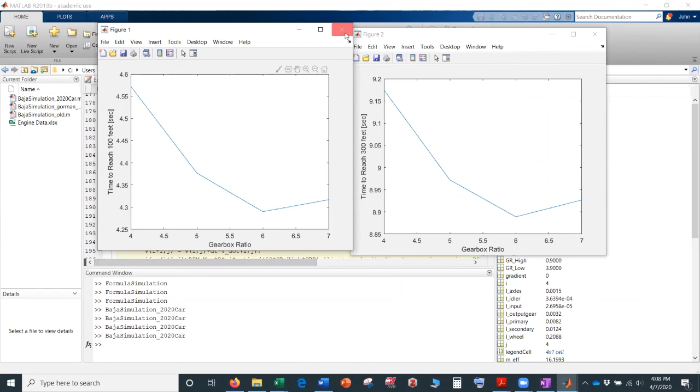I guess they're all pretty close to each other. So you can see you can go a little bit faster with the gearbox ratio of 6, right? To reach like 100 feet. So yeah, let's play around with the Formula One a little bit more. So we use around a gearbox ratio of 4.

So let's look at what happens if, you know, we can look at kind of the behavior. So you can see we kind of come, we shift around the peak one, and then we come up here till we hit the max. And here we're getting limited at about 60 miles per hour, it looks like.

Since these are not scatter plots, they're not giving us the actual values. Can make this a scatter plot. Hopefully it doesn't not like me because of that. Oh, that's not even the right one. We wanted to do this first one.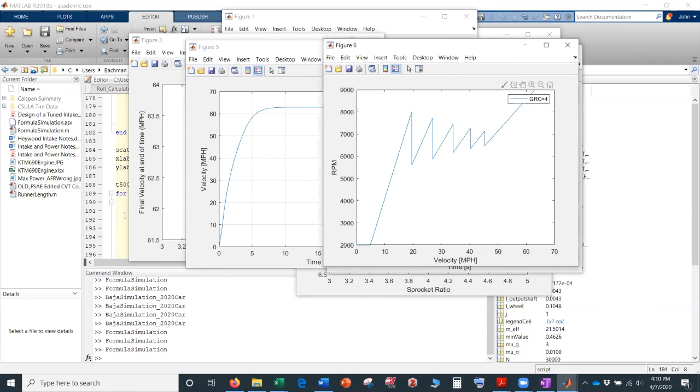Let's see what happens if we only used like gears 3, 4, and 5 or something. So we said, hey, I'm gonna copy this so I don't lose it. Chris, are those the actual ratios of those gears in our transmission? Yep. Yeah. Well, that's what the manufacturer gave us at least.

I know that a lot of schools disable some of the ratios. Yeah, we might not need some of the higher ones, to be honest with you. And we probably don't need 6, to be honest. I don't know if we could actually on our course shift through 6. But depending on which ones you pick, you might pick a different gear ratio. You'll notice these gears are closer together. The first 3 are further apart.

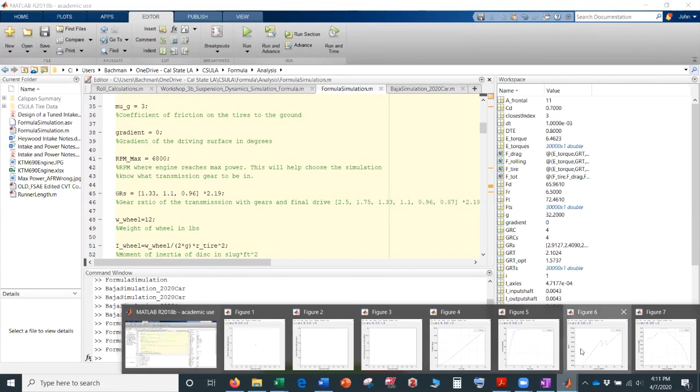So you might disable your first 2 and just run with these 4 gears that are kind of closer together, because we're going over a narrower speed range than a typical car, right? We're going like 0 to 40 or 50 miles an hour. We're not going 0 to 150. So you might pick these to help you shift more frequently. What you might want to do is use the lower one to get you up to some speed, skip a couple, and then just rely on high gear.

Yeah, the only thing is, we can pick the sprocket ratio. So we could make 1.3. So you could either use this and a low sprocket ratio, or we could use these and a high sprocket ratio, because we can change the fixed gear ratio. So we could take all 4 of these and center them to be good around like 5, 10, 15, 20 miles an hour. Or we could make this like 5, 15, 25, 35, 40, 45, right?

So because we can change the sprocket ratio, which I'm kind of messing around with here, it's more about the relative gear ratios, because you can basically change this.

So you'll see here, if we knock out the early ones, it's going to shift way late, right? And you'll see that should really slow us down. Gear 1. Is high gear in a transmission an overdrive? Yeah, one of those, exactly. So like this,

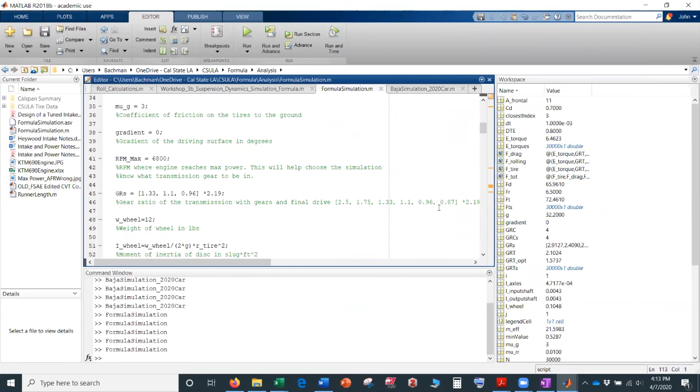I mean, it's never really overdrive because it's 0.87 times 2 times this gear ratio. So the gear ratios all multiply. But yeah, most people would call these overdrive. Inside the box, they're lower than 1-to-1. I was told if you buy a car with a 7-speed transmission, you're getting a 4-speed transmission with 3 stages of overdrive. Huh, that's interesting.

But for me, whether this ratio goes over 1-to-1 is a little bit arbitrary, because I could make this 1-to-1 and make the fixed gear ratio 4, and the whole thing together would be 4. Or I can make this overdrive at 0.5 and make this gear ratio 8, and I would still be at 4, right? Since the gear ratio of your transmission gets multiplied by the final drive, it really depends on the multiplication of all of them.

I would think the best thing to do is to have a low gear to get it off the line. And once it's at a certain speed, go up a couple ranges and then find a range to run between, say, 25 and 40 or 25 and 50, without really shifting. Does that sound reasonable to you? Yeah. I think shifting is going to be a distraction. I think you might be right. You might have more gearing to accelerate, but then you don't have a bunch of gearing in the turns. Yeah, it could be interesting.

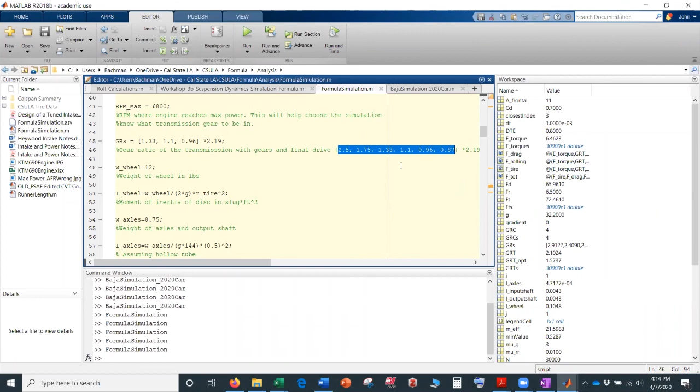What I would do to start is just use all of them and see how it goes. And then if we find we don't use them, then we don't use them, right? I think we have all 6 in there working. We might as well center it around those 6 and see what happens. I think the guys will eventually decide on their own what gears they want to drive the car in. Yeah, exactly. So for example, you saw that was shifting super late.

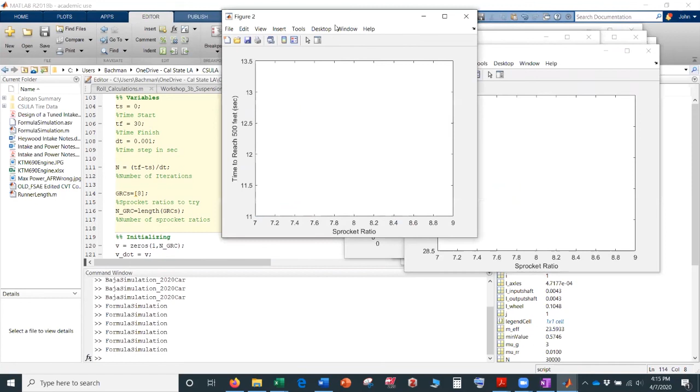But if I change my sprocket ratio to 8, you'll see it's all of a sudden not going to look like it was shifting so late. Now it's shifting at like 15 miles per hour, so now we're shifting actually kind of early. We're still going to do bad on time because we don't have that many gears. But ideally, if you want the best time, we could try a couple of different sprocket ratios, 2, 4, 6, 8.

We're just talking pure time. Bill's right in that it's going to be hard to shift in these corners. But if the car could shift on its own and you had 5, 4, 3, and all these gears, and you had 0.5 or something, you're going to be shifting a ton, and this would be like 1, 2, 3, 4, 5.

So you can see for one in this purple, kind of hard to see. I'm trying to pick out one color you can actually see. I guess the blue you can see. You shift once, twice, 3 times, 4 times, 5 times, 6 times, 7 times. But you can see this line right here. This is your propulsion limited line.

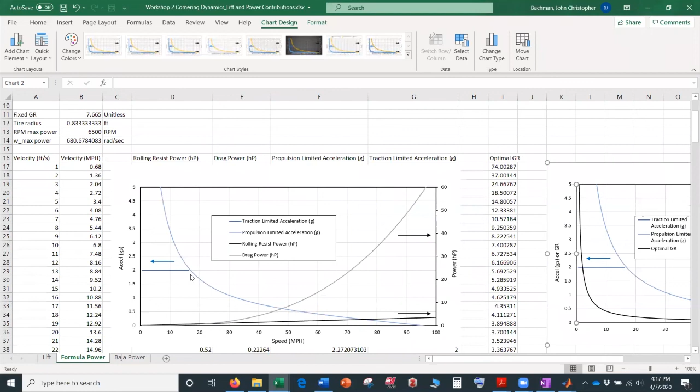That's what we were showing in this curve over here, right? If you could do it perfectly, you'd sit right on this propulsion limited line. So if you have a lot of gears, it really lets you sit on this propulsion limited line, right there at max power, which is good. And you can really get your times down. So here we got a 4.6. That's one of the lowest ones we've seen so far.

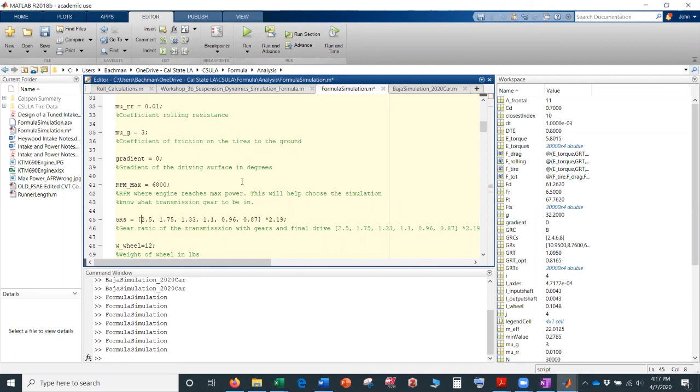And even 2 gets you pretty fast, I guess, if you add those high gears. So anyway, that was more just to show you that we have this tool, and just to try and understand the physics of the car as it's accelerating, basically. So Baja looks like this: drive belt slipping, it's speeding up in low gear, and then it shifts all at this peak power, basically.

So the Baja engine, interestingly enough. If you could make a better CVT, what that would really involve would be making it shift across a huge range, right? It only can go across a factor of about 4. You could maybe have it shift from a gear ratio of 10 to 0.5. That would be really hard to do mechanically. That's just a hard thing to engineer, something that changes that drastically.

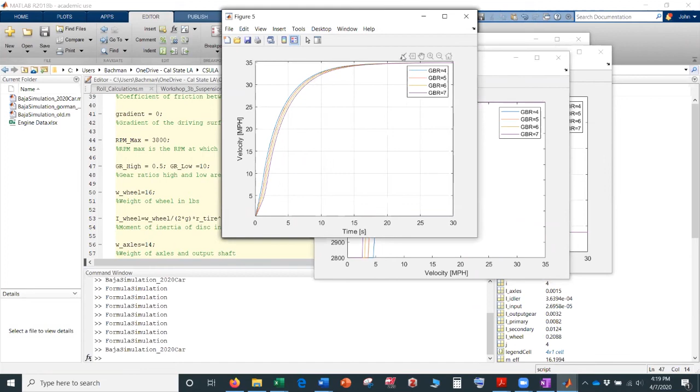But here you basically stay perfectly on the curve; quickly you get up to your max power and you sit at your max power the whole time, because you can start off in that really low gear. So where was the one with the gear ratios? Basically you start off at 10 and you start shifting right away. And then, let's see here, this is interesting. So you can get low times. We'd even have to go lower, it looks like.

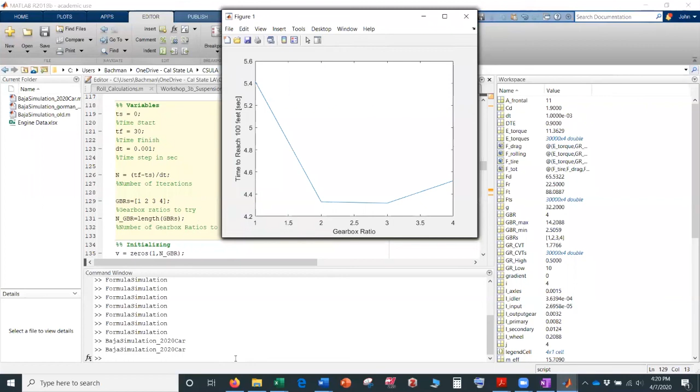Let's see how low it would go if you had a really good gearbox. So maybe you could go like 1, 2, 3. So this would be our gearbox ratios, because we build a gearbox for this. And in the manual that you had, when you shift, is that delay just the delay of it engaging? For the CVT or for formula? For formula. Every time it dips from that curve, is that just from the fact that you have to put it in a new gear?

Oh, when it shifts off the optimum curve? Yeah. So pretend you're on this purple line. It's because you're going off of max power. Because you're in a fixed gear, you have to go off of max power, you drop below max power, and then you get back into max power. So it's not actually a time thing. It's because you're shifting around max power, instead of ideally sitting right at the perfect max power, like Baja can do with the CVT.

Keep in mind though, a CVT is not a very efficient system. So the power you lose by being slightly off max power is probably better than the losses in having a friction belt. But yeah, going off that peak is really about getting away from your max power, because you're no longer getting the power that you'd expect.

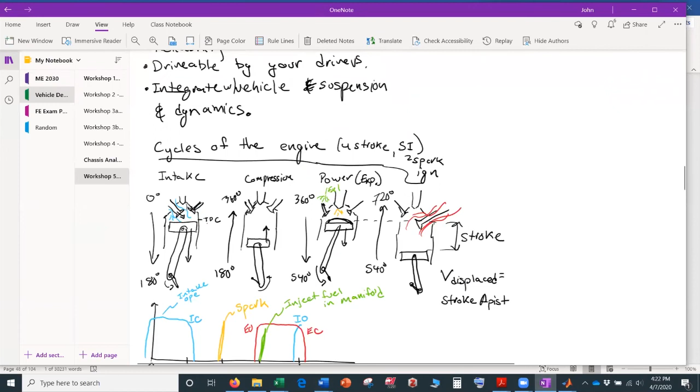Anyway, I'm about to hop into another group meeting, but today we talked a lot about engines, and about getting as much air and fuel in as possible, getting the timing right, getting the right mixture of air and fuel. That was a lot of what it was about. And then we talked about how you can design your car so that you sit near max power as long as possible. So we did a little bit of the kinematics of the gears. Ideally you want to stay right here, but of course formula is shifting up and down around that point.

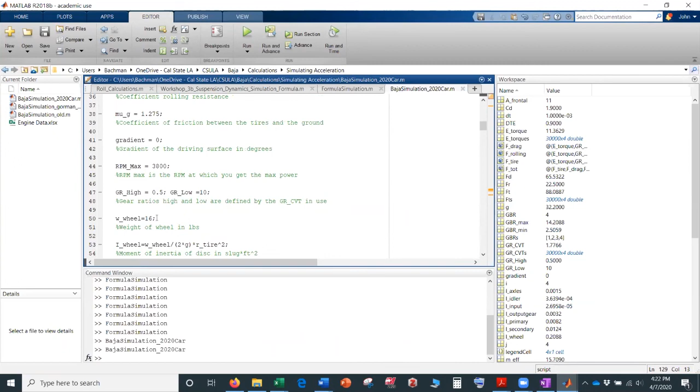So with that, I'll post up some of these tools so you can start to play with them. If you have any questions about them, just let me know. If you have MATLAB, you can start to try different... where's Baja's? This is Baja's. So Baja can try different CVT ranges and then try different gearboxes. You could also see what would be more important, to double the grip of your tires or to double your engine power. There's no limits to what you can analyze.

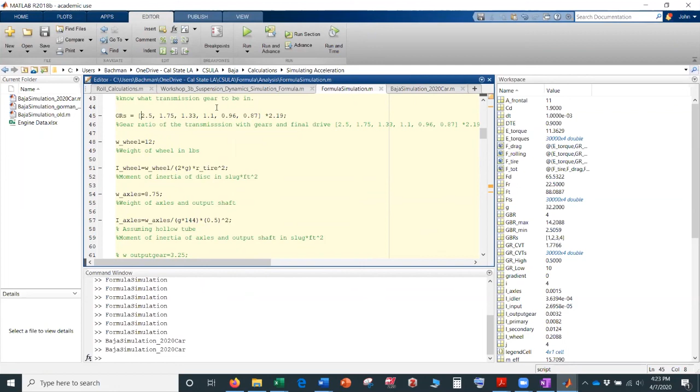Not that it's all useful, but you could try, hey, if we had to pick 4 of these, what would we pick? And if we pick those 4, the optimal gear ratio of our sprocket will move around. So for example, if you pick these 4 high numbers, your sprocket should be a little lower than if you pick these 4 numbers, where your sprocket's got to be a little higher to make up for it, right?